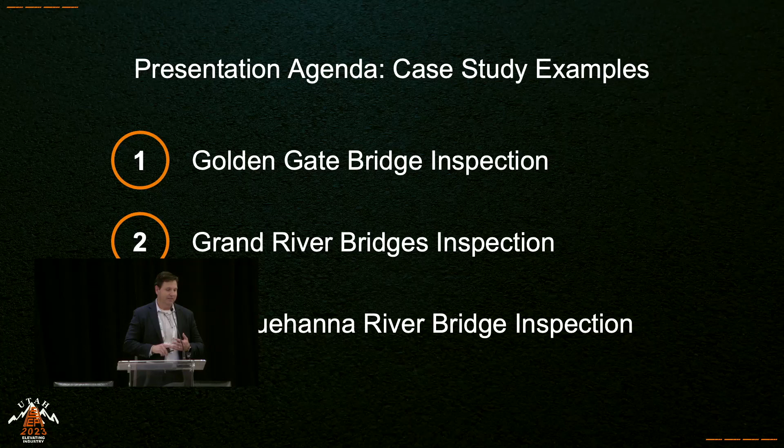So to start off with the Golden Gate Bridge, we provided inspection services since 2015. We conducted the first ever close-up visual inspection of the main suspension span towers in 2018, and then drone inspections piloted in parallel for a section of the bridge in 2021.

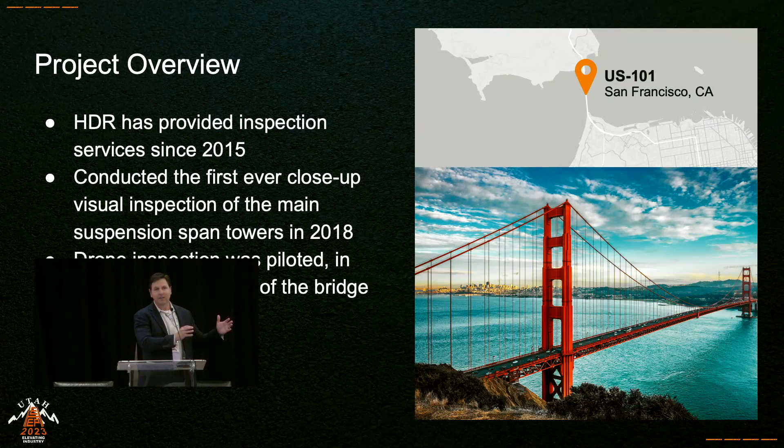What we appreciate with some of the clients is they're really forward-thinking, saying, okay, how do we use a tool and complement it? Our approach was we don't want to just depend on it. It was a project where we did it in parallel. This was a blind test done manually, and between the two, we're going to talk about some of the results we got out of it shortly.

So planning and approvals, mission planning - we talked about project area review. We looked at the capture goals and determination, airspace permission, identification, risk, equipment, flight plan, weather, schedule.

All those things were considered, but the reality is when we looked at the project, when we got all the permissions and went to the FAA, it still took a couple weeks. They were saying, well, because it's never been approved, we didn't know how to approve this project. So sometimes when you're doing the first one, even if you provide the appropriate documentation, it still takes a little while for it to get approved finally.

Equipment selection, that's another thing we'll talk about. We went with plan A, B, and C. When we looked at all of the factors, environmental factors - obviously Golden Gate has wind. That was a big concern of ours, the number one concern. So we brought a BFD drone. This is about a $150,000 drone that can handle winds up to 35 miles an hour.

And what happened is as we started to fly it, the seagulls took it down. So we're like, okay, we're solid for the wind. And then we get it up in the air, and just like 20 seagulls start dive bombing. And I'm like, man, that's not cool. We went and hid behind a rock, did it again. The seagulls couldn't see it, they started circling. As soon as it was visible, they came and attacked it again. So I was like, okay, plan A's out.

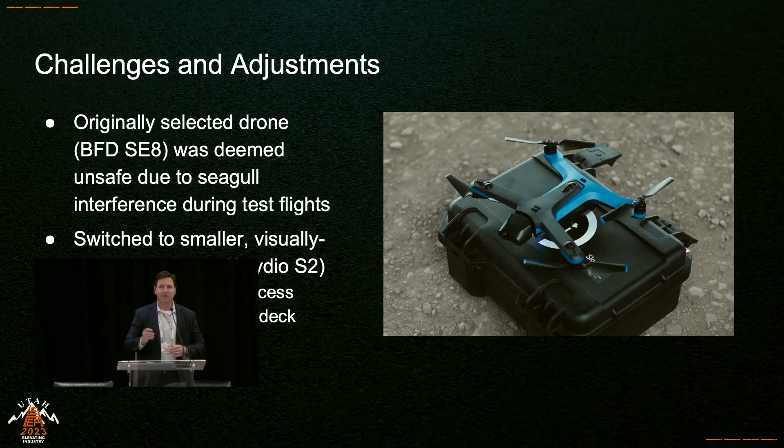Data comparison, traditional versus UAS collected. Still frames from the video were extracted, matched to the applicable bridge section, and included in the completed inspection form. So we took the drone data and put it on the traditional reports that Golden Gate Bridge Authority in California is used to. Comparative analysis performed between the reports, and what we found was condition, state of truss members were similar. The identification of gusset plates, pack rust was similar.

This was a blind test. Traditional rope inspection, drone inspection, and then those were compared independently. What was nice is those values came out the same, which was good to hear for the value of drones in the industry. The thing that didn't come out the same was the paint condition state varied.

Wasn't a big deal to our inspectors. But we think it could be attributed to somebody rappelling down, backing off, taking a picture or looking at it, versus a drone 20 feet away with different lighting and exposure. So that could have been part of it too, but it wasn't as big of a component that we were concerned about.

Lessons learned: approval, processes, efficiencies. I think the first time you do it takes a while. The second time you do it, it's a lot better. In the case of the Golden Gate, when we got that permission, it took almost a month to get approval. After that, the next deployment was a week or less. So that's part of what to expect for approvals.

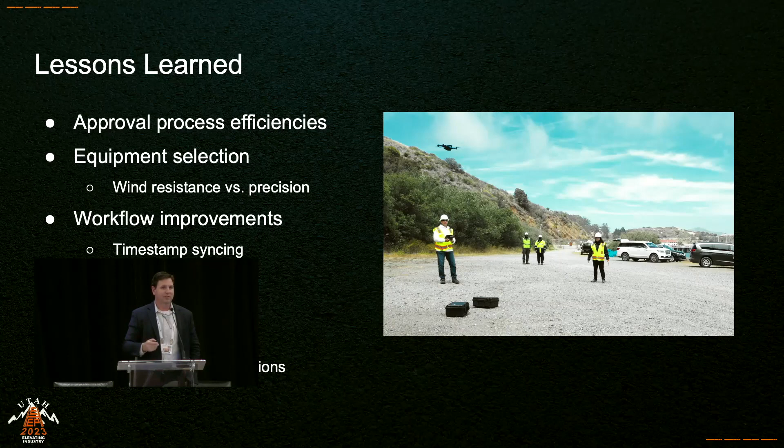Pivoting to US 131 Grand Rapids. This was the first official bridge inspection for Michigan DOT. Part of it was to provide routine visual and element level inspections. Some of the challenges, if you look at the picture here, are high traffic volume, entrance and exit ramps, structure width, and heavily populated surrounding areas.

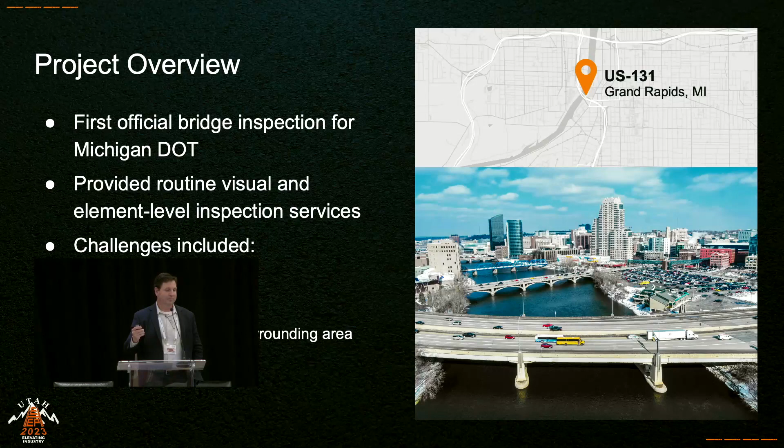The other part too is because of the span, getting equipment on the side and a bucket to come underneath just couldn't reach. So the drone, because of the equipment and whatnot, offered a good alternative for all of the variables that were listed.

So we did a total of 18 flights on 3 spans on both structures from the riverbanks. We used a secondary drone, kind of like Paul showed earlier. You want to capture it overall, capture the side. You could get the digital twin of the area, but then you want to complement that with close-up photo inspections.

We piloted the flights of the structure in a sweeping fashion, working with Mike, who's in the room with Bentley, to help determine the best capture guide. If you capture it wrong and don't have the appropriate overlap, it could impact your result. So following best practice guidance on that is critical.

Project approach: scope development with client, sitting down and understanding what their goals were was important. Planning and logistics, site access and coordination, and then we used the 5 critical rules for planning drone inspections. If you look at the top right image, those were the 2 spans and kind of what we did for some of the flight patterns, and the area of interest was on the bottom right.

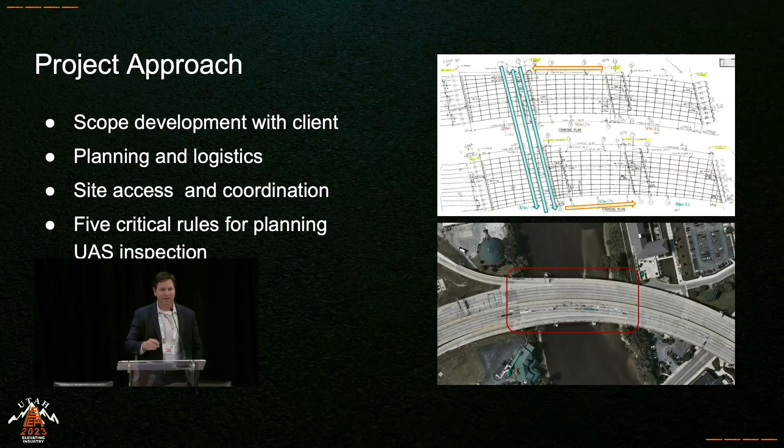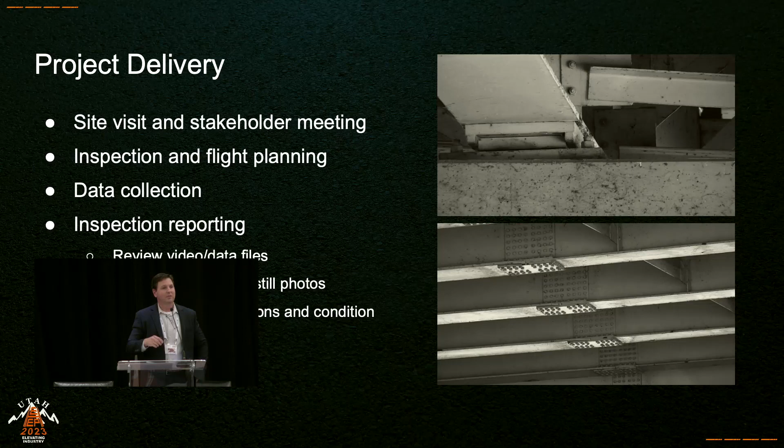Project delivery: site visit and stakeholder meeting, inspection and flight planning. We provided the data collection. On the reporting side: review video data files, assemble captioned still photos, and summarize observations and conditions. Again, even on this one, at the time we were hoping we could gather some good information from it, and it worked out as expected.

So on the element level conditions and the visual conditions, it checked all the boxes on those. We knocked it out of the park on that front.

Just talking about the lessons learned, the technical checks. This was 5 years ago, and drones have evolved. This was a DJI, which has a magnetometer and gets interference from the bridge. As you get into new drones, you want to start looking at new capability, like the Skydio which flies off of visual, 360 visual, and doesn't have the electronic interference we're seeing here. The other part is GPS denied environments.

When we went under the bridge deck, we were in GPS mode, turned it into ATTI mode, which means you don't have the GPS. The other part you can get in trouble with is if you're going under a bridge deck in a GPS denied environment and you don't toggle it off, it might give you a latency. And if you have wind, like in this case, the wind was streaming underneath the bridge, it can cause you to wreck before you get control again. So it's a science, but it's one that we were ready for. We went into ATTI mode, captured the data that was required, and it worked great.

Weather and site conditions, and then camera and unit operations. On this one, we had a drone with a camera on top where we're taking some telescopic photos, so we stayed a good distance from it.

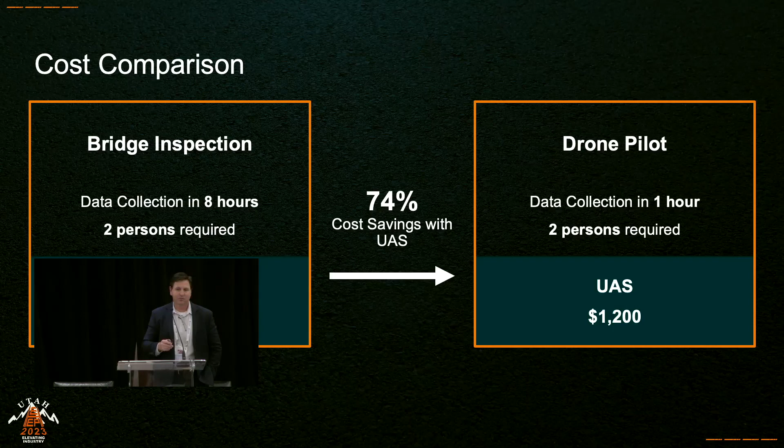Bringing in some water to the transportation world. And then lastly, we're going to talk about the Susquehanna River Bridge drone inspection. This is nearly 1 mile long, 4,600 feet, 14 piers with a maximum height of approximately 175 feet, a 76-foot end-to-end drop from 516 to 440.

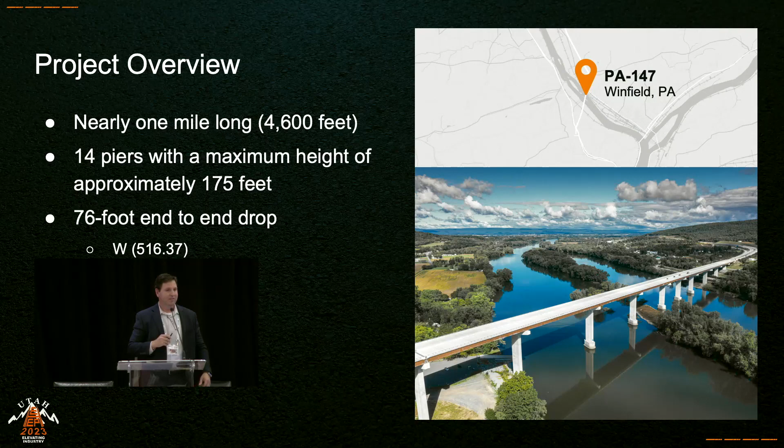What we ended up doing is doing the piers, and then we worked with Mike Burkasey with Bentley, and had a nice combination where he was able to get the bridge deck, and we combined that data set together. So this was kind of a hybrid test pilot project, and it's pretty cool.

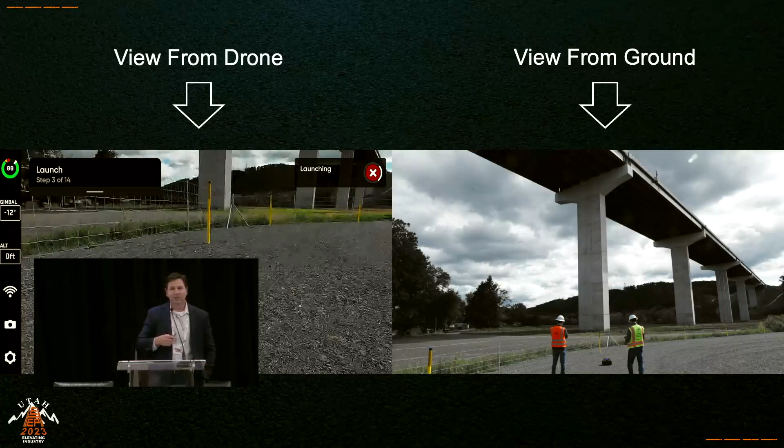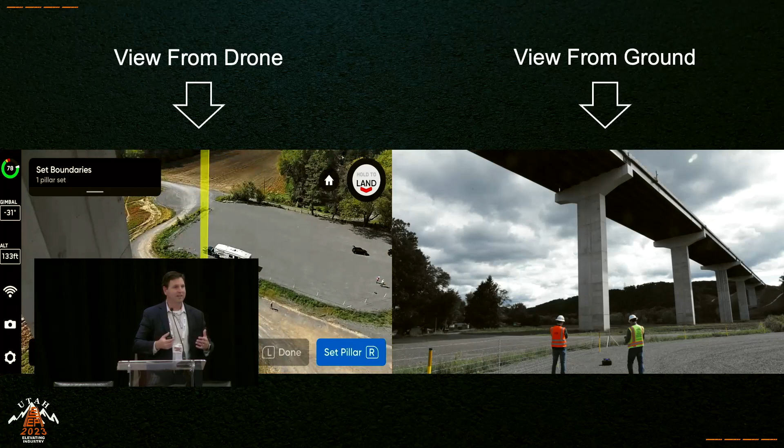So this is kind of what we're looking at for these pier decks. The video on the left is what the drone sees, and the video on the right is what you see from the ground. These piers are 175 foot, so if you're flying and your hands get sweaty, like, man, don't wreck, those type of things. This is one where just the perception of how high it is, you start to get nervous.

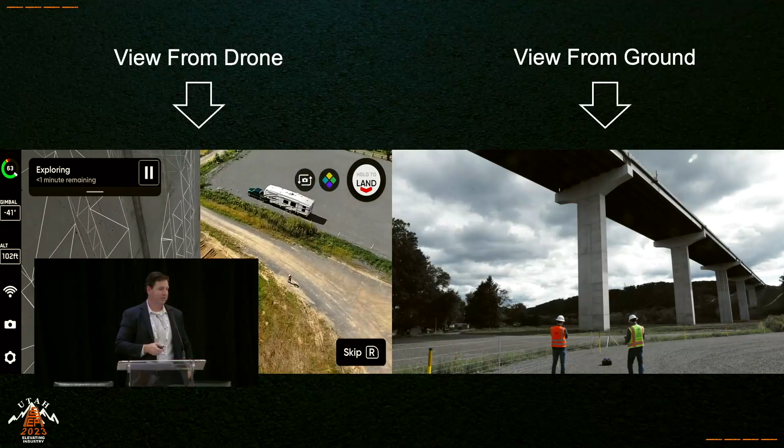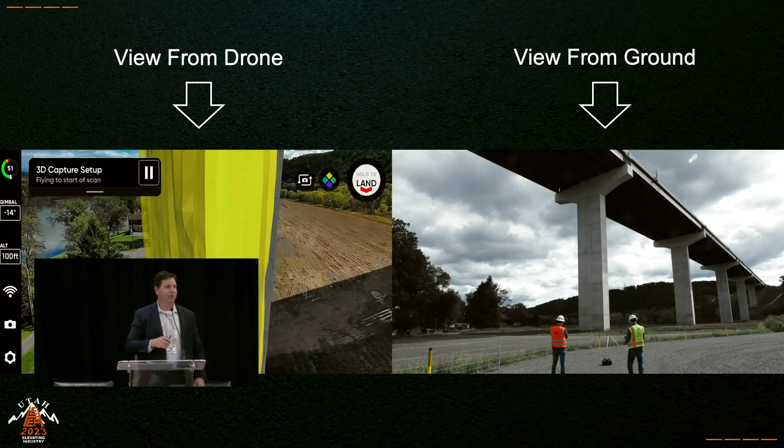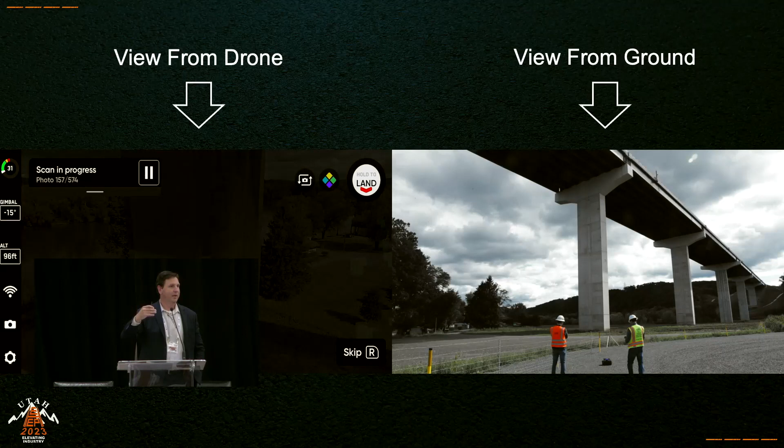But what's cool is you tell it what your bottom is, what your ceiling is, and the 4 corners, and you say go. It'll put all of this in an exploration mode, put it in memory, and then you say go, and it'll go collect 2,000 photos on its own, and you're just watching it and changing batteries. So it's a nice way, because it does the visual. As you saw here, it goes underneath the bridge deck, not concerned about losing GPS information, not worried about it crashing. Just a new tool. And then you can see again where we're standing from the ground.

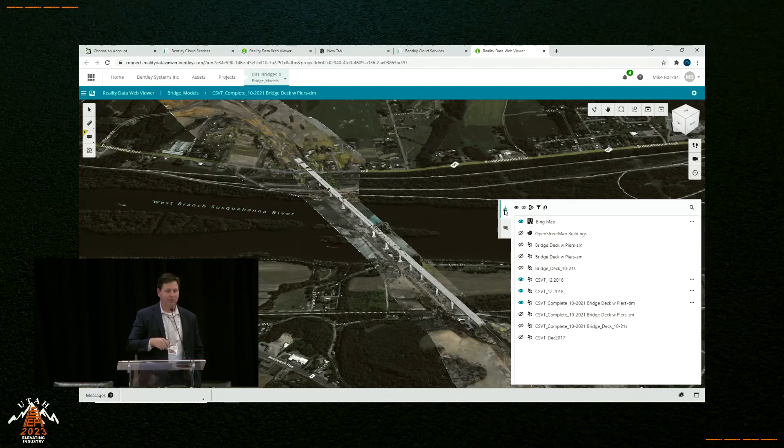Now, in the end, we're going to see where this comes together. This is something where taking the top deck and the bridge and combining it together, we're able to blend the photos. If we look at this, this bridge was being constructed at the time, so this is over multiple years. One year it was captured, there was dirt. The next year it was captured, they poured the caisson and the piers. Then they're building up the piers, then they're laying the deck.

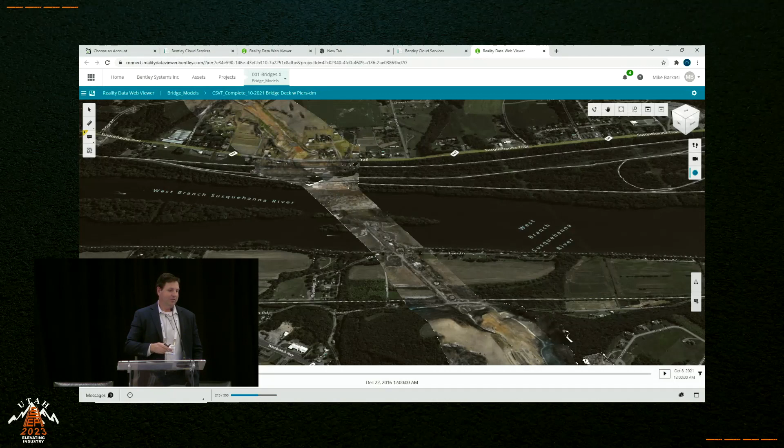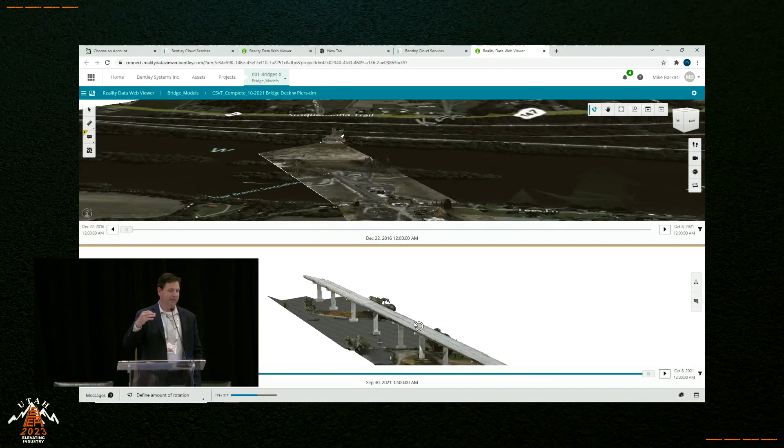So what's nice about this is bringing it into this iTwin environment and being able to compare what it was like before, when it just had the caisson, and this year, and see what the finished product looks like, or see what this is. So if we're looking at 4D phasing, construction, and progress monitoring, it's a tremendous tool.

I was talking to Mike earlier, and one of his comments was we tested out the drone in the box on a project in Florida at SunTrax, and because of the FAA rules, you can't fly beyond visual line of sight. So our thing is we tested it inside of a building. We had a big warehouse we were constructing, and we just let it go and let it run daily.

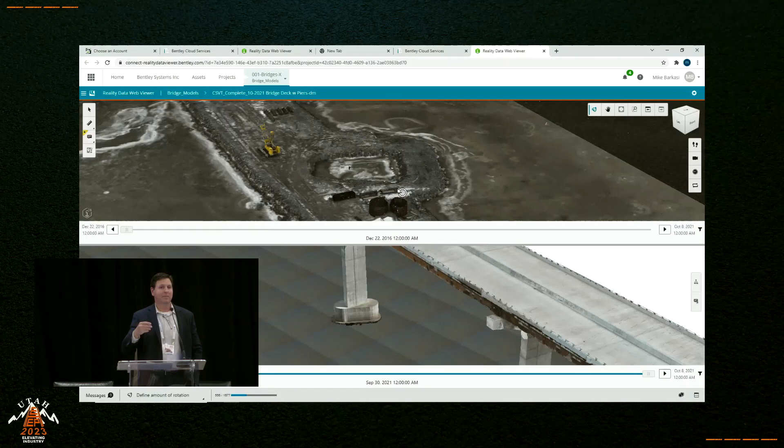So something like this is becoming more mainstream with beyond visual line of sight, where you can take it up at a site, launch it, go perform this capture, come back and land, and update the data. It'd bring the cost way down and give you progress monitoring from your home station. So that's something else we're looking at heavily.

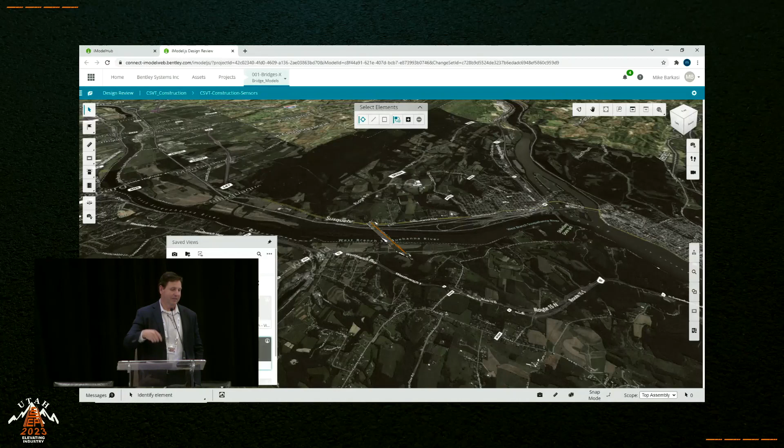So blending, kind of like Paul showed before, having all of these components laid out, and then adding your engineering design into it as well, and being able to use that information. You'll see a picture of it here shortly. So you could take your engineering drawings, overlay it onto your drone topographic data, your reality mesh, tie it to survey control, and then, like we talked about before, do multiple flights and show the progress of those as well.

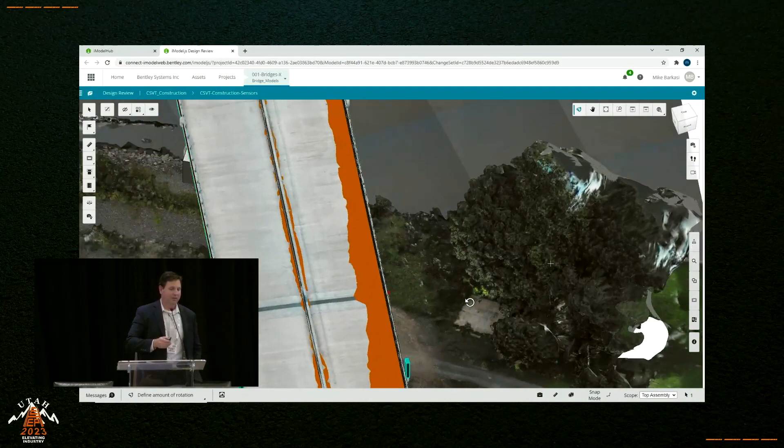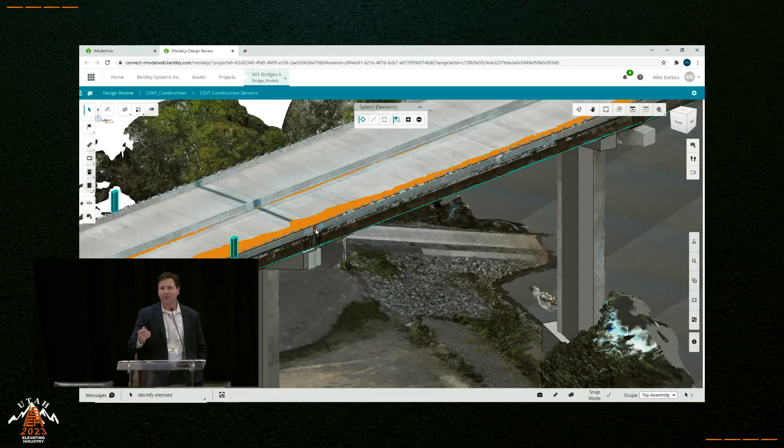Here's a case where you can see some proposed sensors that are being put onto the pier. So we have the actual and then the engineered, and see if those kind of match together. Nice part about it is everything's web-based here, so you're not just having it on the desktop, being able to see it through the web and share it with the teams across the state or whatnot.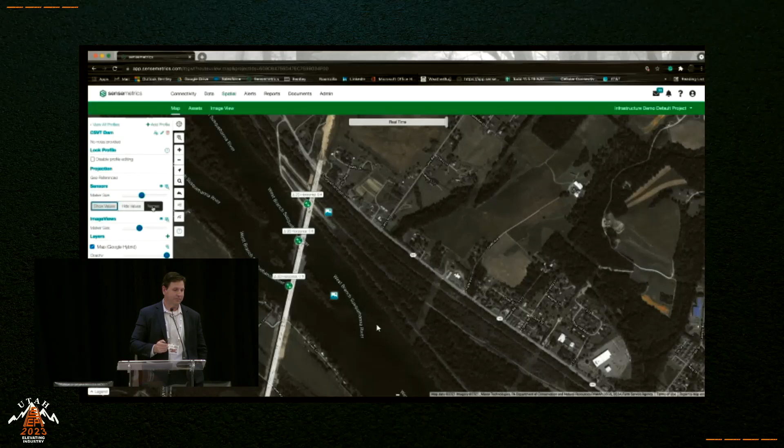So we were showing a presentation yesterday of inclinometers showing, okay, here's a landslide, and here's where it's shearing. It's shearing between 18 feet and 23 feet. That type of data. So IoT could be an inclinometer, it could be a weir flow sensor on a dam, or any kind of sensors that are on a bridge as well. They're all integrated.

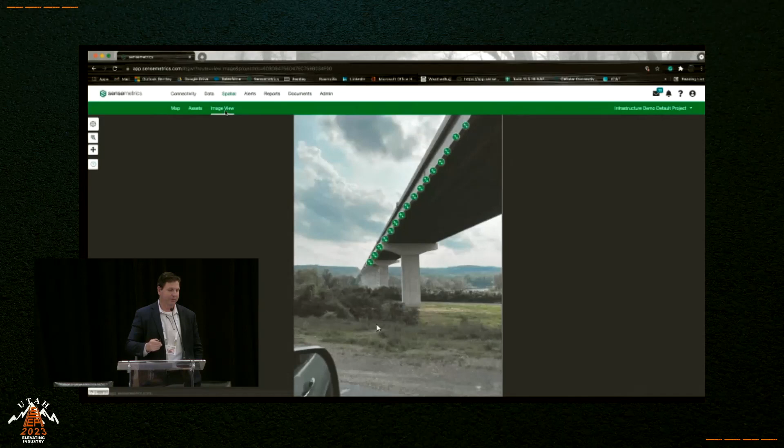So project outcomes: improved safety, time and cost savings, unrivaled accuracy. I want to qualify that statement too, because you could have a total station take some very accurate millimeter shots. You could have a LiDAR, but if you're crossing a river, your range is limited. So when we say unrivaled accuracy, it's for cost-effective unrivaled accuracy. Because if you have survey control tied to this, having 1 centimeter data, 2 centimeter vertical or whatnot is tremendous.

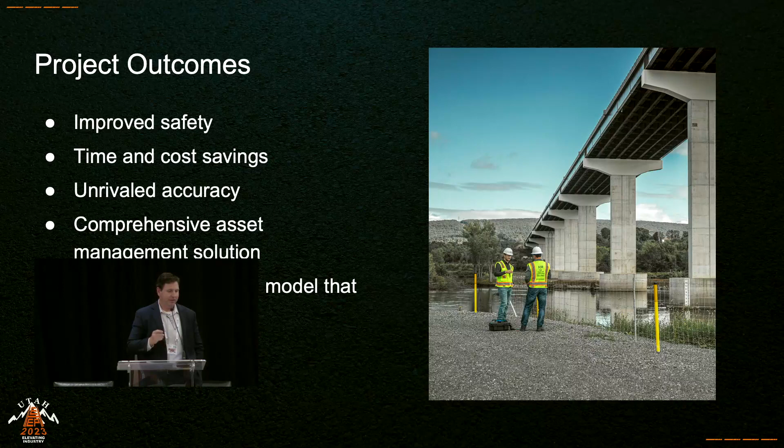So, what's the cost for that particular asset you're covering? Comprehensive asset management solution and a long-term digital twin model that can evolve over time.

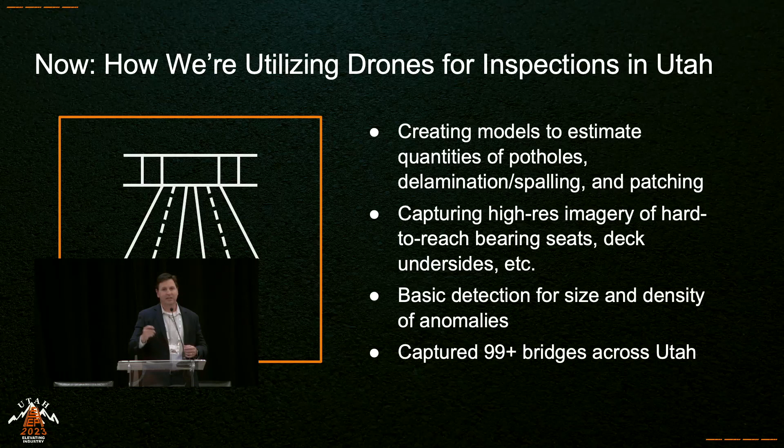So in Utah, we've done some work here. We created models. So the way we're using drones in Utah is we create models to estimate quantities of potholes, capturing high-resolution imagery of hard-to-reach bearing seats, deck undersides, basic detection for size and density, and then to date, we've captured about over 99 bridges with drones in Utah.

Here's an example, the Ogden 24th Street Bridge. It's a mapping mission. You come into here, and this is just a zoom in. One component there too is it doesn't have to be tied to control. Depending on what you're trying to do, you get some great measurements.

Our old school method is we'll go lay out a ruler and place it on both sides of the bridge deck, and then we'll fly it. So we can get some accurate measurements that are relative, that are more than sufficient. So you don't have to invest in GPS in certain projects. If this is what you're trying to do is quantities, there's your QC of it and how you want to use it, and you don't need a GPS or RTK for it.

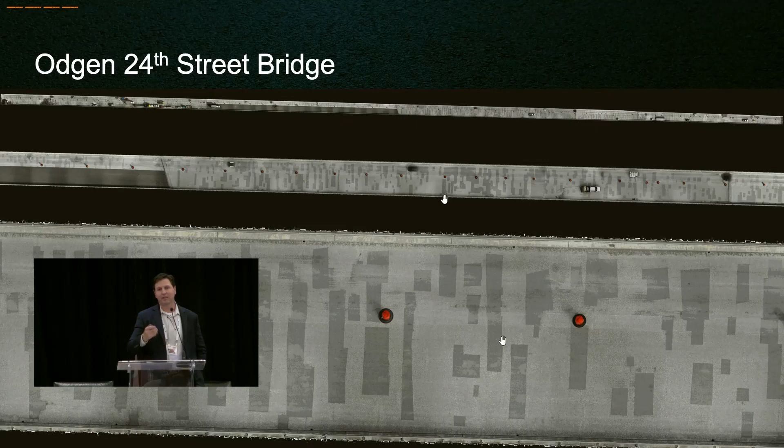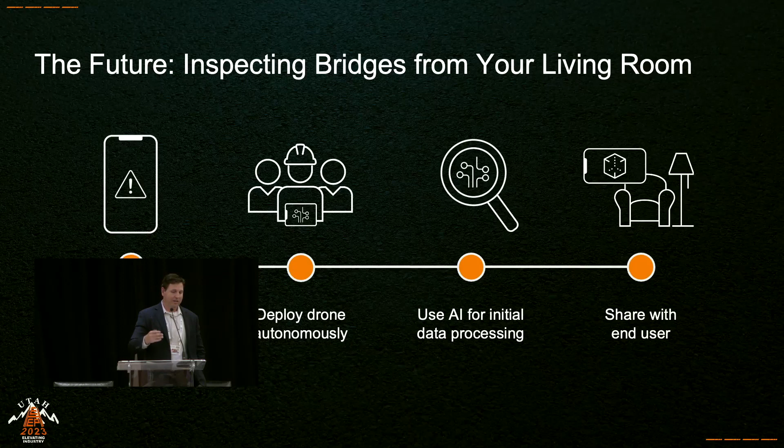So the big picture, here's an example. Let's say you have sensors on a bridge, or somebody notices something and they call you in the middle of the night. You can deploy a drone autonomously, you could use AI, and then you could share it with the end user.

So another thing that Paul was showing with the virtual, but here's an example where we took that CSVT bridge, took 14 piers, created a digital twin of those, and now what we're able to do is take all of those that are 175 foot high, and let's say that there was a crack on that pier. We get a call in a different state. Somebody could come on, load up the VR, and this is now looking at that environment.

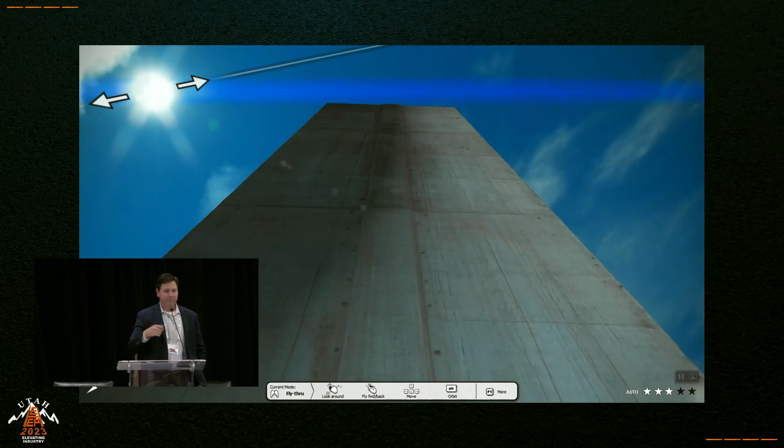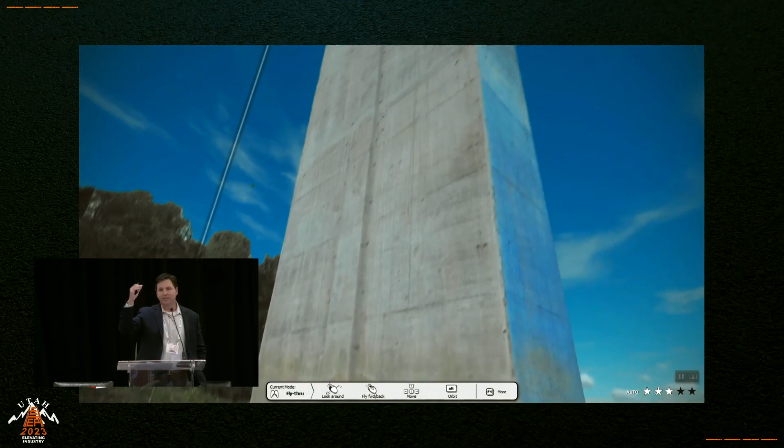So I can access any of the 14 piers, even in the middle of the river, from a headset. Now I'm looking at it from the bottom. I'm coming across, you can look at the sun angles, how does it impact, and visualize it. And then lastly, showing kind of the cars and traffic that are animated. Coming to the pier, and now let's say that it's 100 feet in the air. Well, I'm gonna time warp to that level and put it at eye range, and I'm gonna inspect it as if I'm on the ground.

So this is kind of the future that we see with it, regardless of the size of the bridge, regardless of how tall, how complex, being able to have that information at your fingertips from your home is the key. So appreciate the time today, and if you have any questions.